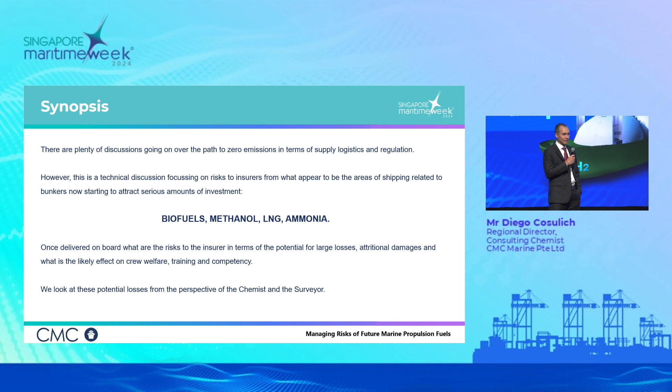So today we'll discuss the new fuels, particularly biofuels, methanol, LNG, and ammonia. Now, when it comes to biofuels, these are the easiest transition for the industry; they are so-called drop-in fuels. So ships, engines, and crew are already there for the most part. They behave mostly as existing MFO and MGO.

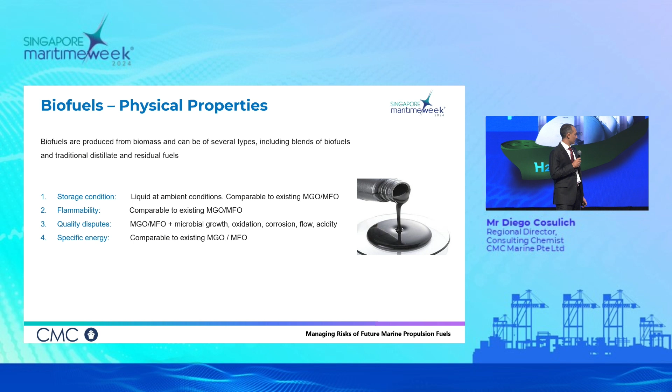The risks associated with this particular type of new fuels are mostly related to prolonged storage, because of the bio component. It basically spoils rather quickly. So you want to avoid prolonged storage because this carries the risk of microbial growth, the risk of formation of deposits, and ultimately corrosion of the bunker tanks.

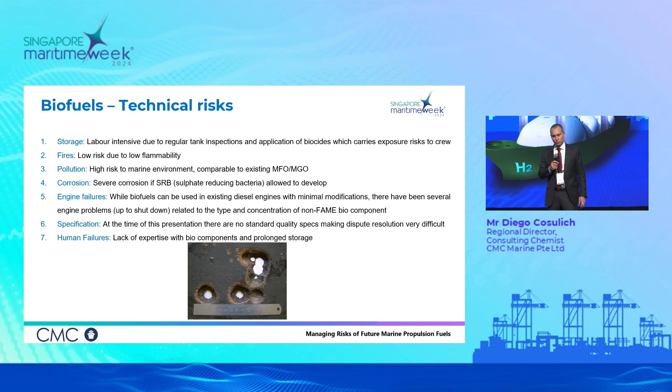Now, there are also risks when it comes to solving and confronting a quality dispute because the specifications are not there yet. And also when the new ISO 8217 comes out, it will not really address the reality of the current biofuels, because it will address mostly the presence of FAME, and the current biofuels are made of a lot of other biomaterials.

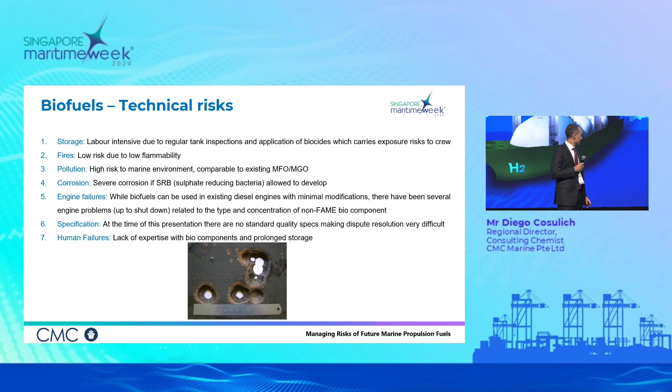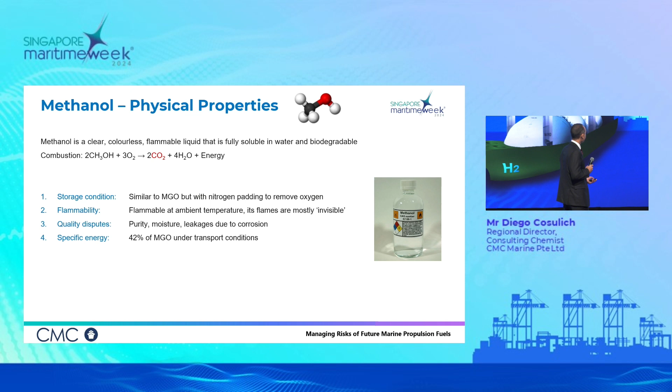We are going to see now a short video, and this is particularly interesting because methanol behaves differently from any other type of fuel in the sense that its flames are mostly invisible, and this carries a lot of concern, because one thing is fighting a fire you can see, and another matter is fighting a fire that you cannot see. So I'll show you this video, which is 30 years old. It's a race in the US. Cars were fueled with methanol, and they had a leakage while refueling. So you can see the panic because people really can't see where the fire is.

We got a fire there. You can't see it. It's an alcohol fire. Look at people fleeing in every direction. Trying to get out of his car. He just came into the pit. So the driver is actually on fire now. There. See him waving his hand. There's Mears. He's got the flamethrower driving suit on. There's a mechanic who's really on fire. He's on fire himself. He's on fire. He's still not getting that man. The mechanic's still on fire.

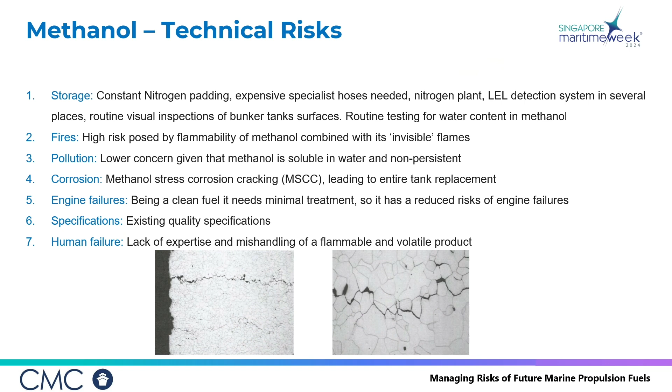So, yeah. Sorry for the strong images, but this is to give you an idea of the risks of a real-life scenario. I've been working in laboratories for many years, and I'm a big believer in real-life scenarios. So as we said, the risks of methanol are related to its flammability. So you will have to have on board nitrogen padding to remove any contact with oxygen, which means having a nitrogen plant, an LEL detection system, and thermal cameras everywhere, because flames are invisible, so you will have to have a way to assess that.

Now, when it comes to pollution, at least there is good news. Pollution is a much lower concern, because it's biodegradable. So if you have a leakage of methanol, it basically disappears rather quickly in water.

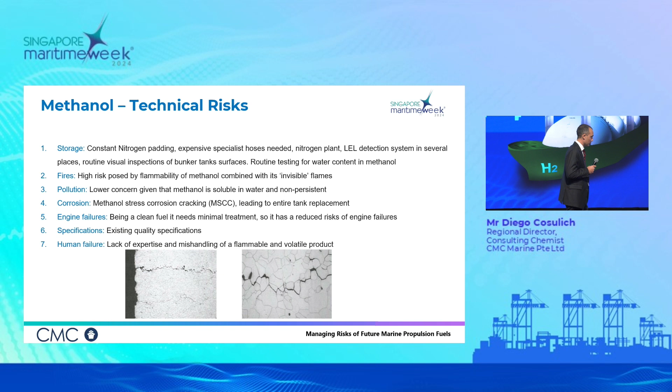The problem is also with corrosion. Methanol undergoes a chemical process called stress corrosion cracking, which means that the bunker tanks containing methanol will have to be inspected very often, much more than bunker tanks are currently inspected with residual fuels. So this means stoppages and inspections.

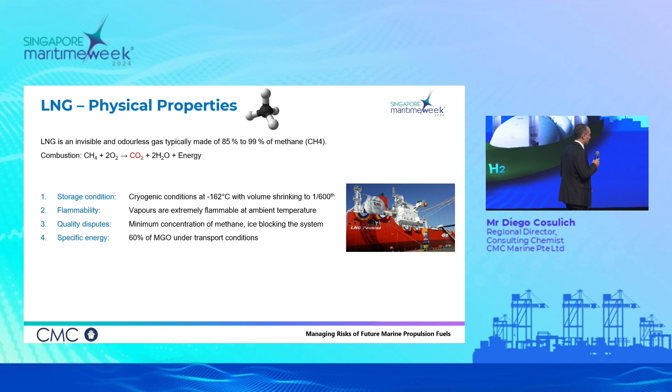Now, I'll show you another video related to the properties of LNG, and I want to show you how strong LNG is whenever you have a failure in the cryogenic conditions. Let me.

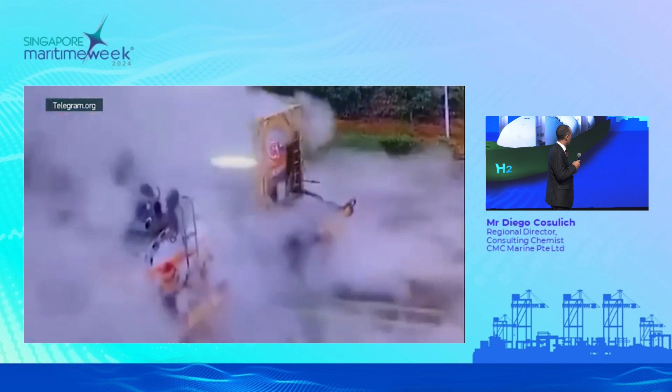Yeah. So you have a leakage, and the first thing that everyone usually tries to do is physically contain it, which is absolutely impossible. LNG is way too strong to deal with manually. So the only thing you have to do is just run away. And the problem with LNG, which is what makes it so desirable, is that it burns really, really well and really, really fast.

Right. So risks associated with LNG, we said, is the storage. So it needs to be kept in a cryogenic state, and this carries the risk of malfunctioning of the cryogenic plant, which means that the only way to deal with it is just releasing it in the air. And this comes with the risk of flammability while you release it, but particularly what happens if you have a failure in the middle of the Pacific Ocean, far away from anything, and you just have to release it. And you go on releasing it until your ship remains without any fuel.

Now, fire, we discussed it; pollution. This, at least from the marine point of view, from the sea point of view, is less concerning because, I mean, it is a gas. So if you had a leakage at sea, you would have a pool of LNG. And even in cryogenic condition, the density of LNG is lower than the density of water. So it would continue to float, and it would transform quite quickly into gas and disperse in the air.

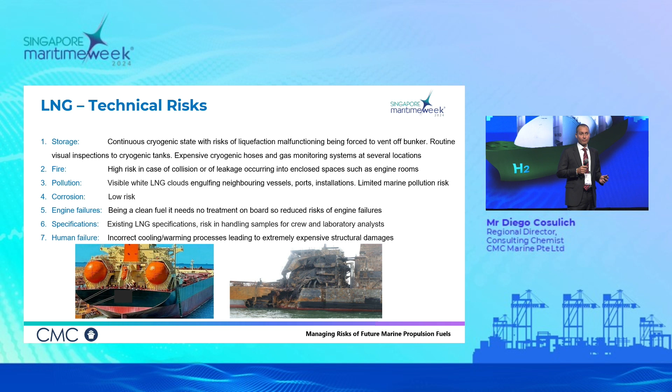Now, interestingly enough, when you see a white cloud of LNG spillage, you're not really looking at the LNG, but you are looking at the condensation of the humidity in the air surrounding the LNG. So you will see a white cloud only for the period of time in which it remains very cold, and then it will disappear.

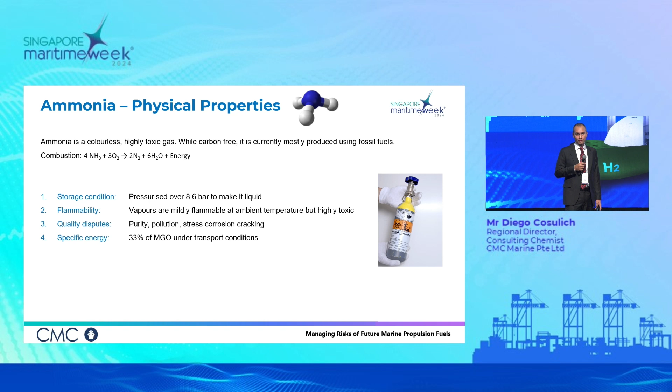So again, the size of your tanks, in this case, should be 3 times the size of current bunker tanks, or otherwise you will have to basically stop 3 times as much to do bunkering operations. And then again, it's an increased amount of operations you have to do through the year, which comes with additional risks.

Now, storage, as we said, this is a gas that is extremely toxic, so you can't really go about it in case of a containment failure in the way you do with LNG. You can't just release it in the atmosphere. So you have to have a second compartmentalization so that you make sure you will not release it in the atmosphere. You can imagine what happens in case of the crew being there, or port personnel, or if the vessel is nearby a town or so.

Fire instead, not a big problem, because ammonia burns really, really badly. Imagine that in order to start burning it, you have to consume a little bit of gas oil just to make it so that it starts burning. So it's not really a concern here.

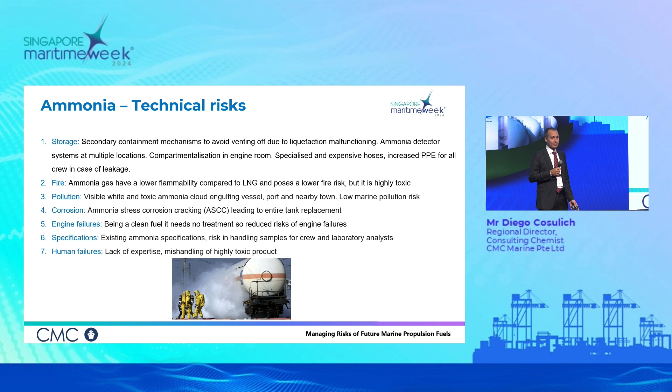Now, pollution is mostly a matter of its toxicity. Whereas corrosion, similar as with methanol, stress corrosion cracking is something that can take place in bunker tanks, and combined with its toxicity, you can imagine the risk. So again, bunker tanks will have to be inspected very, very often, at least at regular intervals, which is not something that is being done currently with residual fuels.

Now, we've been discussing the new fuels as if they're new and scary, but to be frank, it's not that the current ones are that great. We've been looking at MGO and MFO as relatively safe for many years, of course not discussing the pollution, but we've been seeing them as rather safe. Whereas in the last few years, we've had a lot of chemical contaminations in bunkers, which, by the way, kept me very busy for the last few years. And so it has changed the way we look at these fuels.

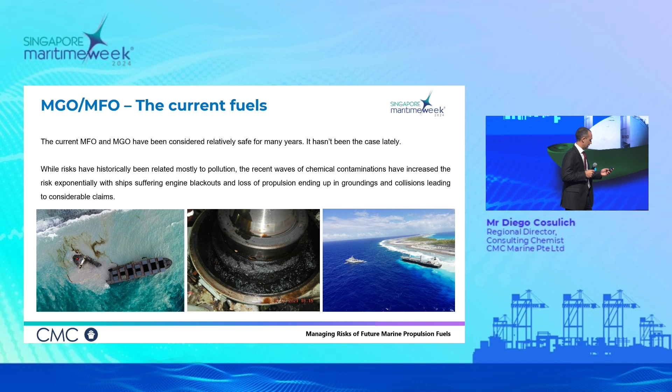You can see here on the right side a case I consulted on, in which the vessel received the bunker in Panama, and when she started using it in the middle of the Pacific Ocean, the engine shut down immediately. The vessel ran aground in an atoll in French Polynesia, and it had to be towed to Papeete and then to South Korea. You can imagine the cost associated with this. They had to change several parts of the engine. So it's not that the current fuels are that great either.

So the conclusions, and I see it's blinking away there. The conclusion is that the usage of the new bunkers is far from impossible. It's just more complicated. And crew will have to be highly trained in handling this kind of product. The attitude towards the bunkering operation will have to change, because nowadays they're taken in an easy way because the products are not under pressure and not very flammable, so the attitude towards bunkering operations nowadays is a bit relaxed. So this really has to change.

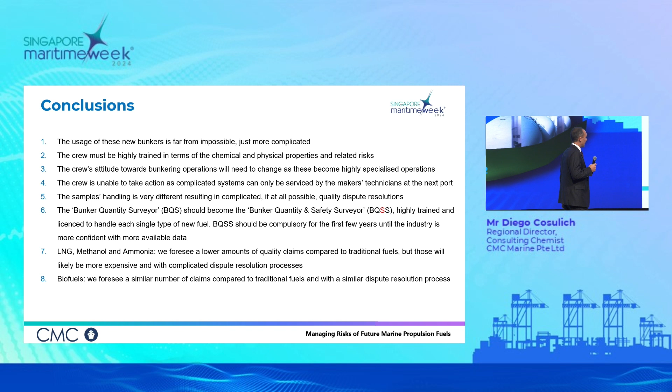One way to do this is changing the role of the bunker quantity surveyor. In my opinion, the bunker quantity surveyor, which has served the industry very well for the last 20 years or so, will have to change and become the bunker quantity and safety surveyor. So we'll have to add one S there. And this will have to be licensed and trained, particularly in handling each single kind of bunker.

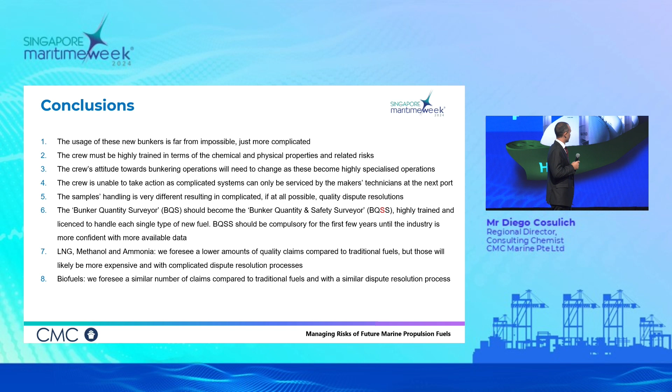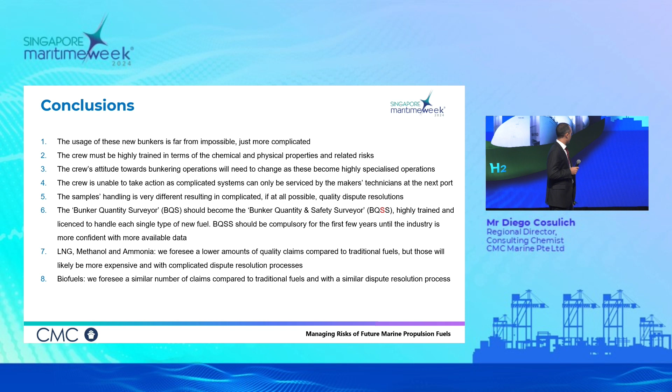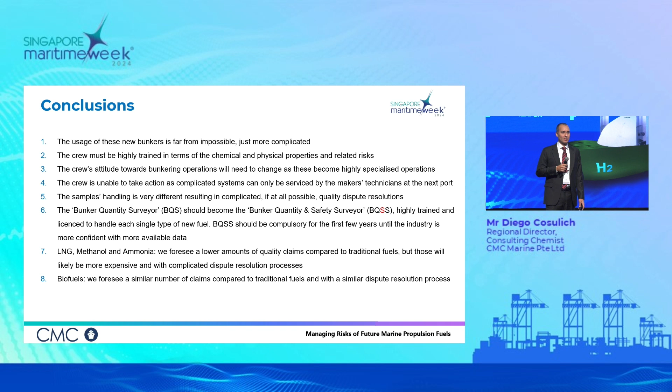So, in conclusion, when we look at LNG, methanol, and ammonia, because they are cleaner fuels, we see a lower amount of quality claims, but those claims, whenever they come, will be very big. Whereas with biofuels, we see a similar amount of claims and also a similar type, for the most part, to the current claims that we handle with MFO and MGO.